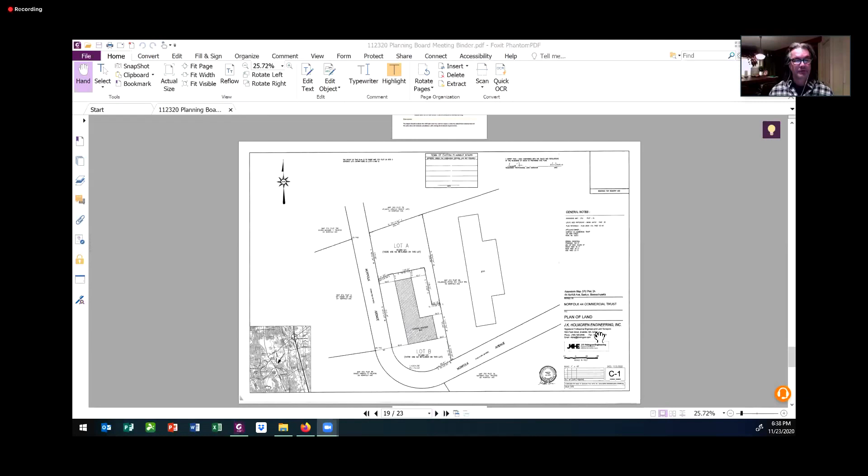Okay, can everybody see the plan? Yes. Okay, I can - I shouldn't answer for everybody. Yes. So this is pretty straightforward. They're looking to divide this parcel of land at 44 Norfolk Avenue into Lot A, which would be a new lot, and Lot B, which would be an existing developed lot. There's an existing building on the site.

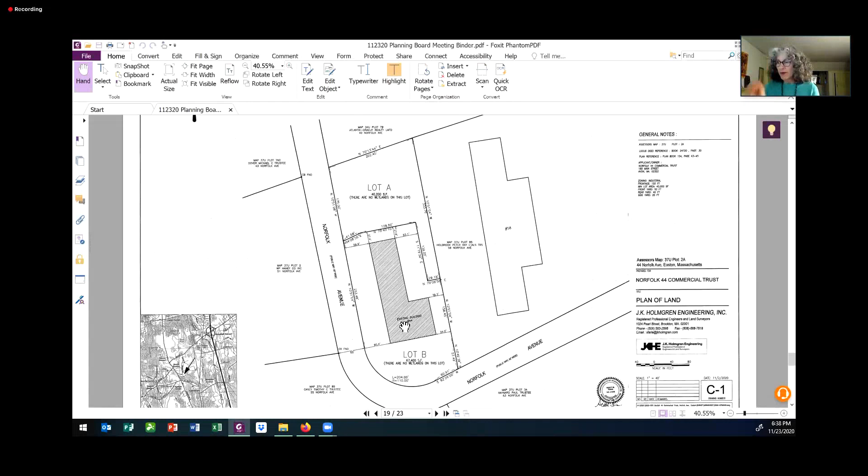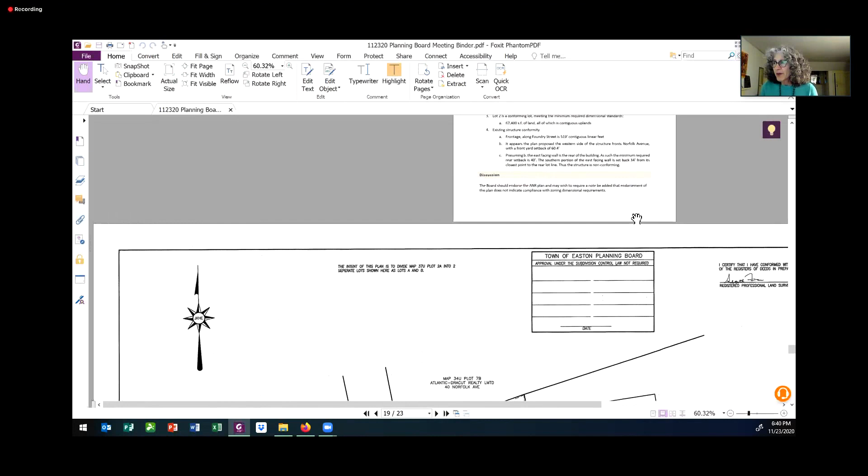Looking at it, because you have the corner lot right here, this looks like how the building fronts Norfolk Avenue. So this would be a side lot that meets the setback requirements. The front lot meets the front setback requirements, but the rear - my interpretation would be that these are rear lots, which I believe is a 40-foot setback. So this existing building currently doesn't meet the setback requirements, and it would continue not to meet them. So the board should endorse the plan, but put a notation on the plan that endorsement does not indicate compliance with zoning dimensional requirements.

So you're calling the rear lot line the one that runs north to south on the east side, right? Is that where you're - yes. Okay, I got you. Yeah, this probably makes sense - we can certainly vote on this, but just have them add that note and you administratively handle it, I would think. Board members, any questions or comments?

I have a question - what is the reason for Lot A to have that weird shape with a very narrow passage in the back there? I think it's to get the full 40,000 square feet, to add the footage. Yeah, I don't know how they're going to use that. And because of the shape of this building, there's a need to keep this a conforming lot from the square footage, and for access.

Peter, you have any questions, comments? No, I mean, as long as the existing building on the new size lot didn't exceed any impermeable area kind of type regulations. Let me look at my satellite.

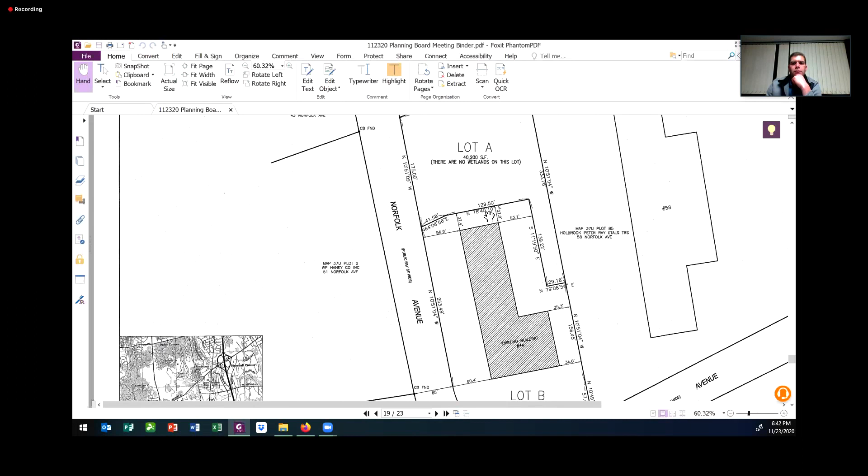Would someone care to make a motion? I'll make a motion to endorse the A&R plan with the note that the lot would still be subject to zoning regulations. Second.

You're welcome. And I see Walter has now joined us and I've made him a panelist. And there's someone named John O'Donnell.

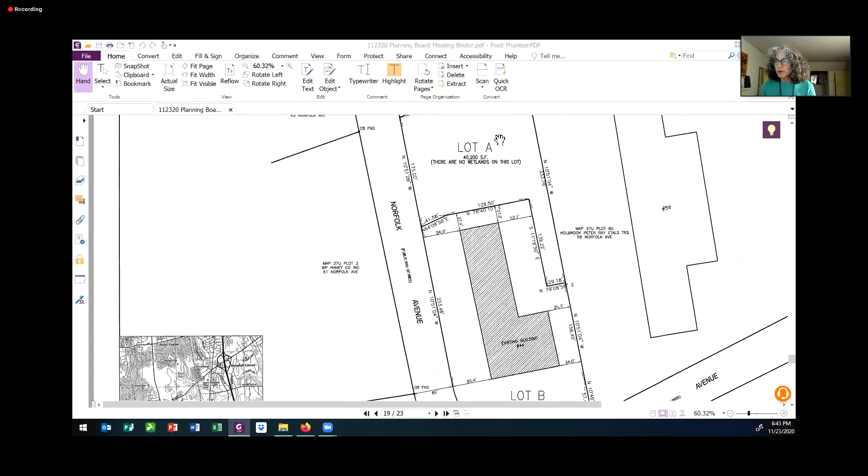If you could raise your hand if you're with the applicant for 300 Foundry Street. Okay, well, Mr. O'Donnell has not raised his hand, so.

Okay. Walter, are you there? Yes, I am, Mr. Chair. Good evening. Good evening.

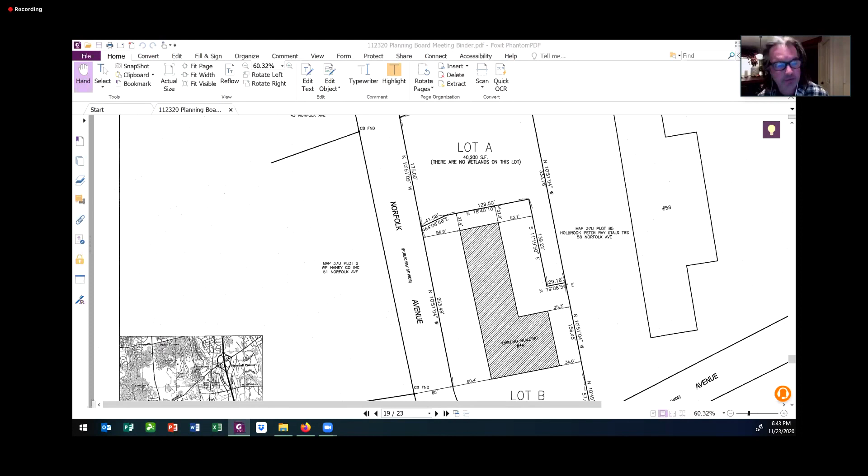So just while you were not here, we read in the notice, and then I commented, which I'm pretty sure you're aware, that we only have 3 members tonight, so we will have to continue. We won't be able to vote. Yes, understood. Okay, so the floor is yours.

And Walter, I can share my screen with the plans, or you can share your screen if you want to go through it. It's up to you. Your screen's fine, Stephanie. Thank you. Okay.

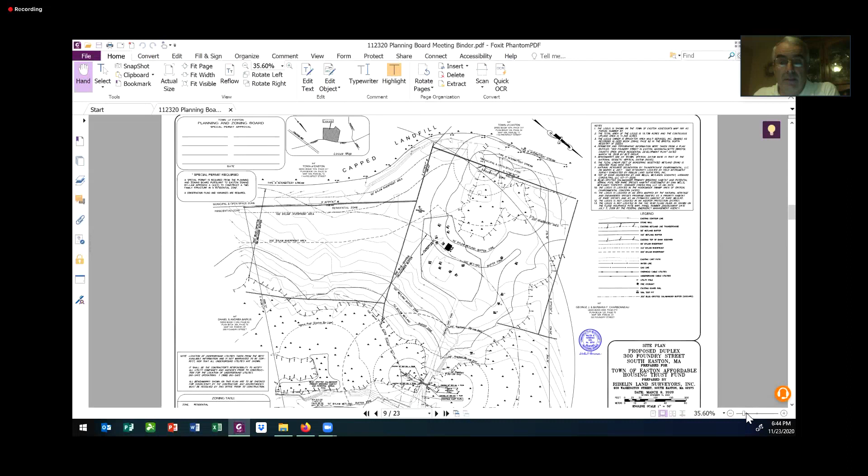All right, what we have before you, and just to be clear, we're talking the special permit for the duplex, correct? Yes. Well, first of all, Walter Hermano, PE. I'm here tonight representing Frank Rieblin, Rieblin Land Surveyors, filling in for Frank.

The applicants have proposed a site plan before you, which, a little bit of background, we've initiated the conservation process. We've also been in touch and in the process with Natural Heritage. There's been a lot of preparation and legwork done on the project so far. We have worked with the town and had a good relationship in putting this project together to this point.

The applicant is the town for this project, and the owner is currently BAMSI. The project entails the development of a duplex 8-bedroom unit, and this is for clientele of BAMSI. As Stephanie made mention in her staff report, she's spot on that the building is going to be living space for group housing for intellectually disabled individuals with acquired brain injuries. This is affordable housing that the town desperately needs.

The town had put this forth a couple of years ago before the people, and it was voted that affordable housing would seek out projects like this, I believe. I forget the exact steps. Some of this predates me.

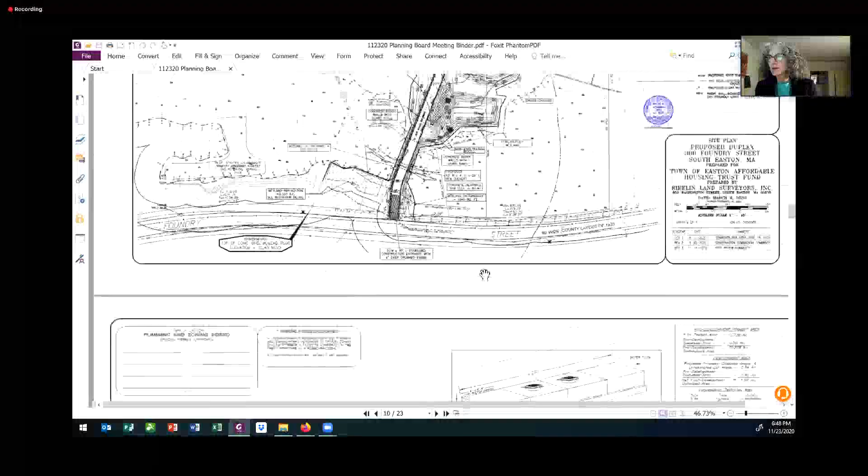The line on the left of the plan for lot 1, we tried to make it as straight as possible. This was modified to include a replication area inside lot 1, which would be maintained under the control of the owner of lot 1, BMZ, going forward. The remaining lot 2 is the substantial acreage of the parcel, over 12 acres, with continuous upland of over 7 acres.

The conservation plan, separate from this one, is under preparation. It's being revised, and I have to get that over to Natural Heritage this week. Hopefully Natural Heritage has already seen this layout tentatively in sketch form, so I'm hoping they take this under consideration and still find a net benefit to the project because of the donation of the land and other features.

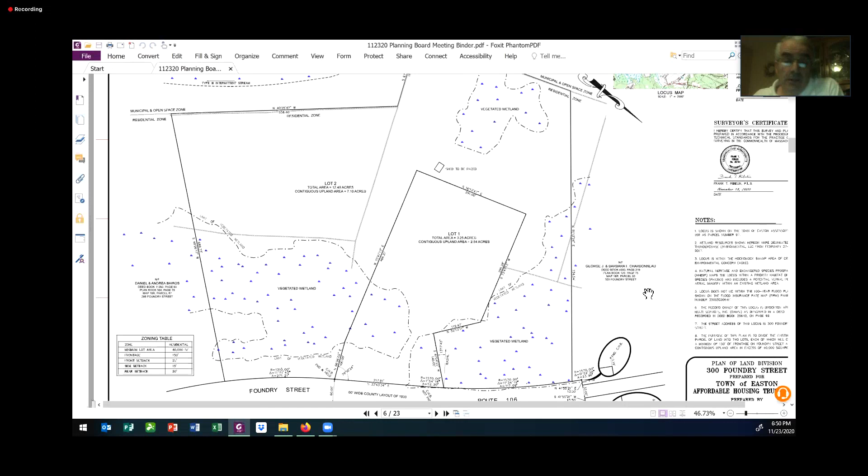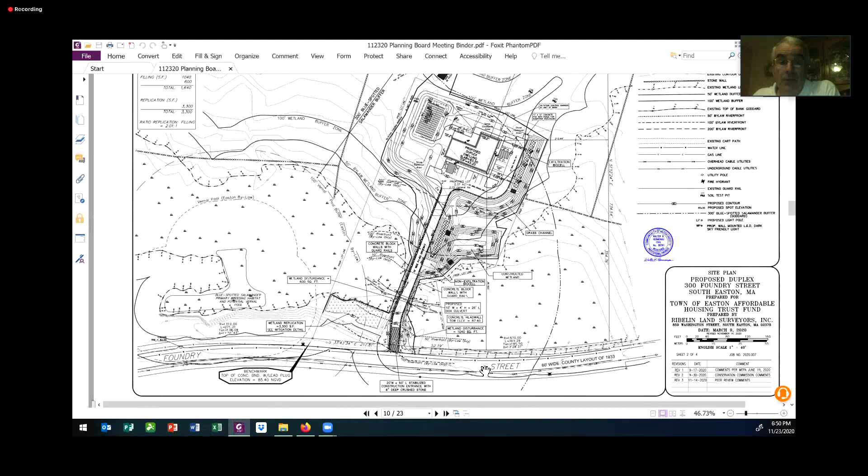We have an improved culvert crossing right after the construction entrance. Currently there's 2 drain pipes, and what's proposed is a 4-foot tall by 10-foot wide concrete culvert that will more than adequately convey any water underneath from the wetlands area on the right to the wetlands area on the left. The 2 wetlands areas are essentially connected. I defined them as 2 points only so I could study the culvert to be sure it's more than adequate, and it is truly more than adequate.

It has daylight catch basins on top and meets the opening requirements of the stream crossing standards. Natural Heritage liked it especially because it was very large and could convey not just water, but also allow for migration and movement of wildlife habitat.

Other features of this project: we met the stormwater management standards enforceable under the town bylaw for both TSS and peak rate of flow. In the beginning there are no impervious areas on this site, and with the stormwater management system shown here between a bioretention cell up on the high point nearest the parking spaces, a grass swale, a secondary bioretention cell, and a constructed wetlands, we will be able to comply with the stormwater management standards of the town bylaw.

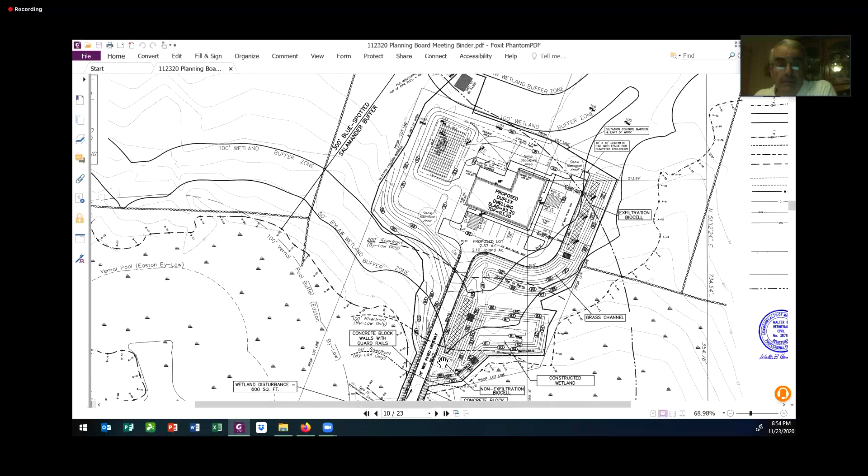Board members, any questions? I briefly read the material, and I think it's mentioned, but if you can clarify the proximity of this location to the landfill and possible contamination. Is that something that is a problem?

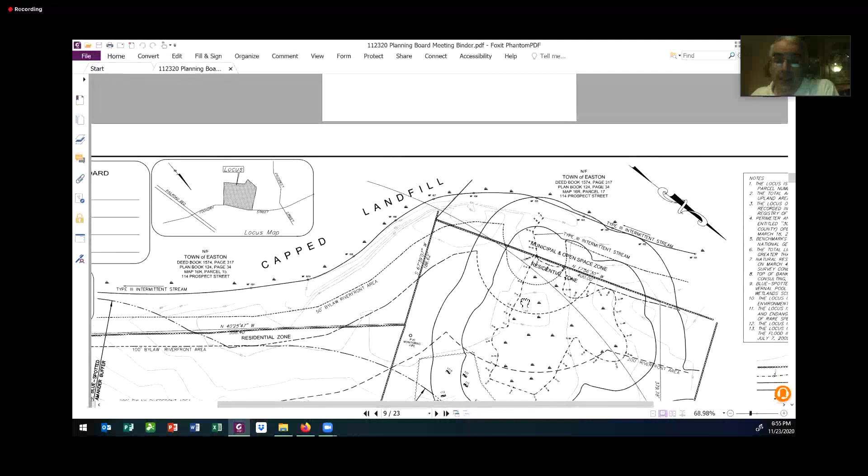I'm unaware of any landfill contamination that might be on the subject lot. I am aware of a capped landfill as being one of the abutters to the south. I have dug numerous test pits on the property, and I can speak to the fact that I've not observed any oil or hazardous materials. They all appear to be natural virgin conditions.

So again, Amos, you can see this is the landfill here. It's on the southwestern side. And to the best of my knowledge, there has not been contamination reported here.

I know the Poilluccis are on the call. I don't know if they were required to do an environmental site assessment as part of their financing. Frequently that is required. If Joe or Jim could respond. No, that was not required, so that was not done. But we were not aware of any, as Walter said, any negative impact on the property.

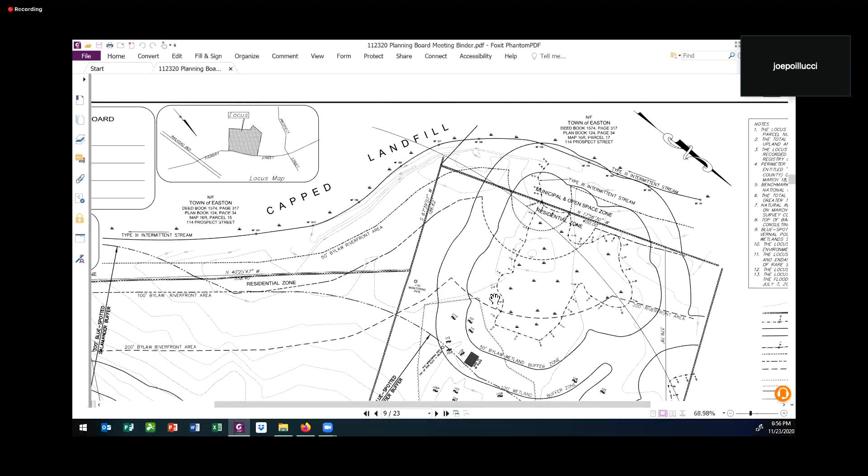And Amos, there was some history with this when they first capped the landfill. It wasn't done properly and they had to recap it, and there was a lot of work done. So I think if there were any contamination that was seeping out, it would have been identified at that time. And that was probably about over 14 years ago. Yeah, I remember, I was here. That's the reason I'm asking, because there were issues.

I don't know the details. So the special permit is because of the deviance issues with the environmental issues related to this property and the wetlands and all the rest of the natural heritage, or is it also the usage of this? It's special permit because it's a duplex. That's a special permit through the planning board.

What about usage? I'm trying to figure out on the table of use and regulations that we have, that's Appendix A of the bylaws, if this usage is listed, and not really, you cannot identify this usage there. So it's considered residential? What exactly is this considered? This is a residential district. No, I know that, but the usage is not residential, not really. This is a duplex group home. It's a two-family group home.

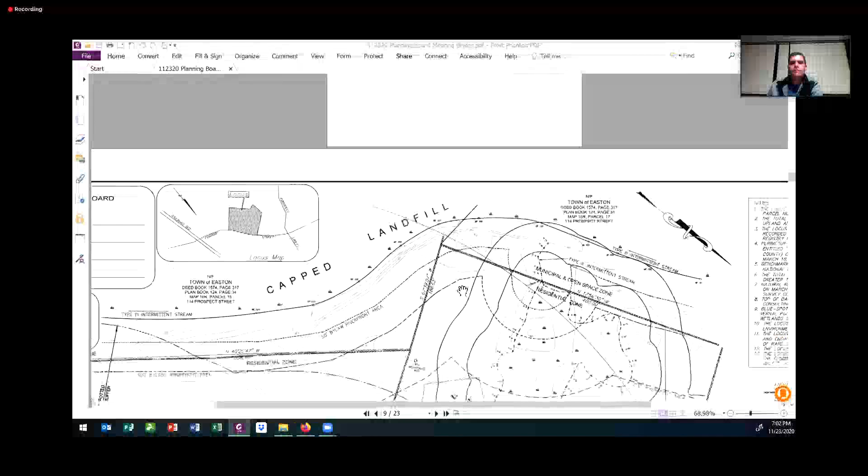So, Mr. Hermano, is there some kind of open yard space around the building for residents to enjoy or walk around? There is some green space around the building. There is no recreational area proposed, but there is a concrete patio behind the building so they can come out and enjoy the nice weather. Essentially, any area you see on the plan around the septic system and between the building, not quite to the property line, will be grassed areas they can come out and enjoy. It's quite a peaceful site. There's a lot of preservation for this project, and I think they'll be able to enjoy Mother Nature on the outside of the building.

And Walter, forgive me if you said this, but where are you at with conservation in the approval process? Mr. Chair, we're in the notice of intent process. We've had our initial hearing. It's been continued. We are going through a stormwater review right now, nearing completion. I'm working with Woodard and Curran on that. They are to receive shortly a revised stormwater management report and plan, which will show some additional measures.

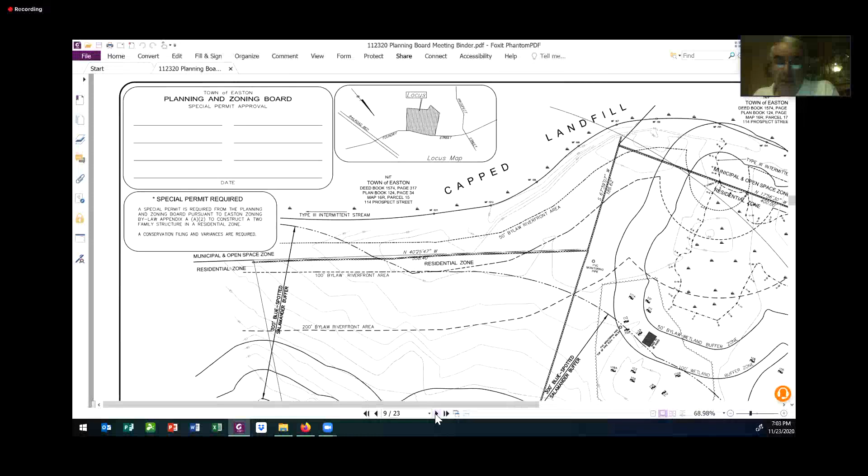Because conservation had a little bit of a concern about additional water flowing towards the landfill on a wetlands area at the rear of the property. This is unavoidable to a certain extent because we've elevated the site and increased slopes due to the septic system and a minor concrete pad. So the revision will show that the concrete pad will drain off into a stone diaphragm, with Cultec units underneath it for storage. So we'll be able to pick up all the runoff that comes off of that concrete pad behind the building.

There still will be a little bit of an increase of water flow in that direction, only because we're changing the landscaping from a wooded, heavily vegetated lot, and that small portion will be grassed. So we're going to have a little bit of additional runoff. But in totality, adding up all the drainage points, my report will prove and document that the water flowing off the site is less post-development than it is pre-development. That's the major crux of the stormwater management standards in the town bylaw.

So do you anticipate any substantial changes to the plan resulting from the Conservation Commission process? I do not, I do not. There is almost no additional area to work with to put in any additional stormwater features, and we are meeting all of the standards right now and then some.

So, Stephanie, how are we going? I know obviously we're not going to vote tonight, given the number of members. Would we kind of slow walk this and wait till conservation wraps up, or? Yes, and at this point it's really just finalizing that small aspect of the stormwater management.

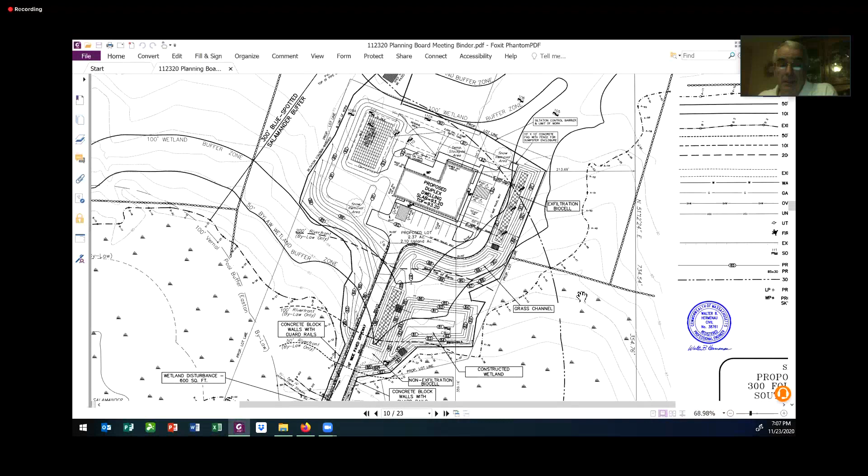It's a well thought out plan, as I began to say in the beginning, and kudos to Andrea, because we've been working with her since the beginning of the project, pre-submittal. So we have a good idea what the town's expectations are and are trying to put our best foot forward here.

Great, appreciate it. So I think at this point, we might as well continue to our next meeting, and then we can decide whether we continue that one as well.

Stephanie, that would be December 14th. To the 14th. Was that a motion, Peter? It was.

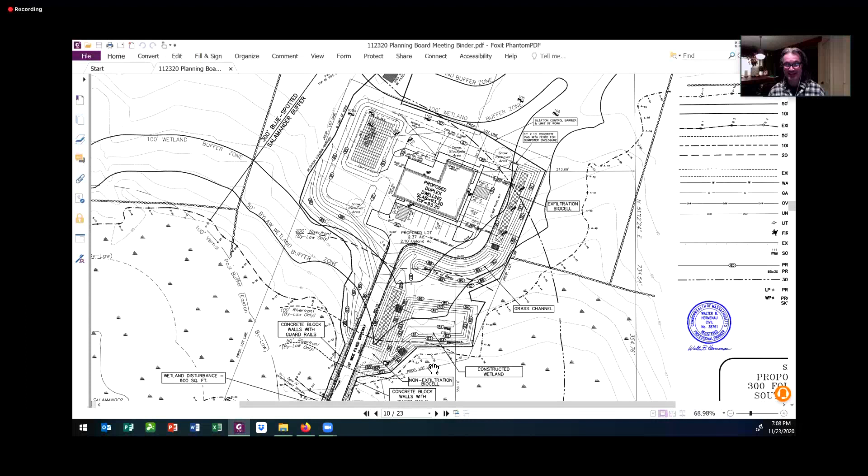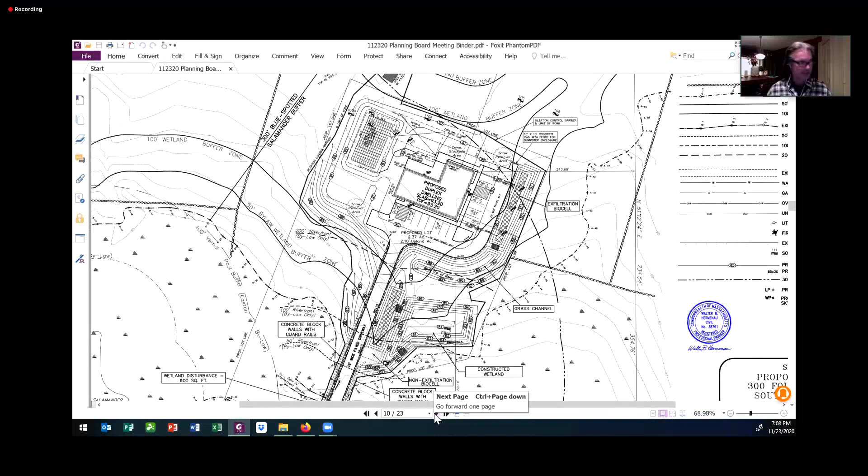All right, thanks. Okay, board business, 2021 Planning and Zoning Board meeting schedule.

So that went out in the binder. Of course, it's that time of year when we need to set the schedule for next year's meetings. And as most of you know by now, we usually have to wait. It's not so much anymore for the room, or maybe we'll be back in the Colleen Corona room again sometime in 2021. But it's really to try to offset the planning board meetings with the select board meetings.

And we're pretty successful in most cases, and certainly where it matters the most. Usually it's just before town meeting, leading up to town meeting, those months where Greg and/or I need to attend select board meetings.

So yes, we just have people- I like it. There's not that many Tuesdays this year. So that's good. Yeah, we were struggling for a couple of years. I'm glad to see my lobbying paid off, and we got our Mondays back.

So see, January 4th, that could possibly be a low attendance night for people ahead. I suppose if I happen to be in Maine skiing, I could attend remotely. I don't think we care where you are while we're doing Zoom meetings.